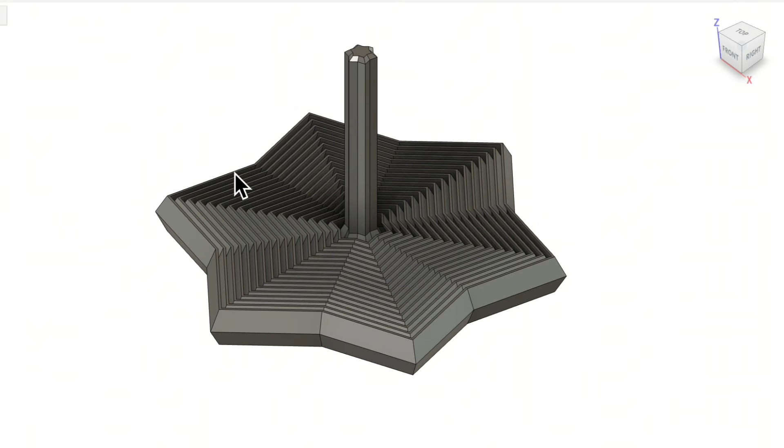This is a print-in-place slider where each ring is printed as a separate moving piece. There are tiny gaps between the rings, so once the print is finished, they can move right away. From this angle, you can see it more clearly.

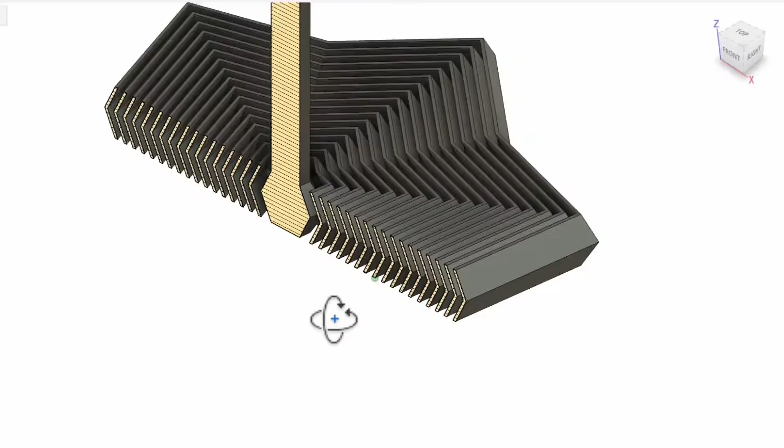Each ring is printed as a separate piece, so it is free to move, but the angled V-shaped profiles interlock with the neighboring rings, limiting the travel so the whole thing can move without coming apart. That's the trick. The parts are separate, but the shape keeps them captured together.

Okay, now that we understand the idea, we can build it from scratch. Right-click the root component in the browser and create a new component. Let's call it Star Toy. First, we'll draw the outer profile.

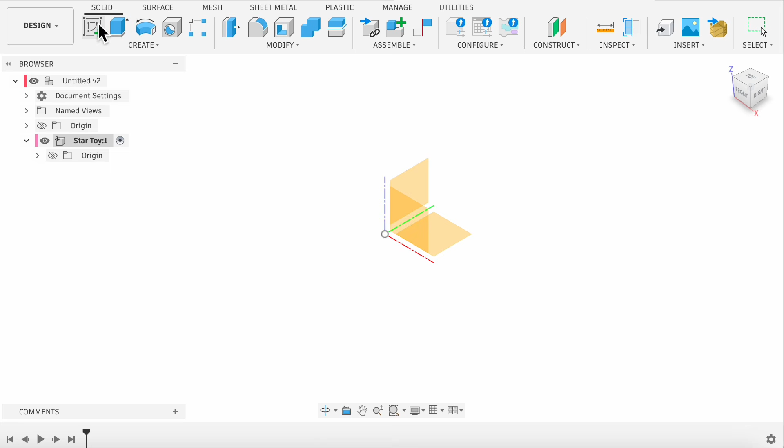I'm using a 6-point star here, but the same logic works for 8 points, 12 points, or almost any star-like outline. Create a sketch on the XY plane. Press C for circle and draw a 100mm circle. Then add a second one at 75mm. These circles are just construction geometry to help us shape the star.

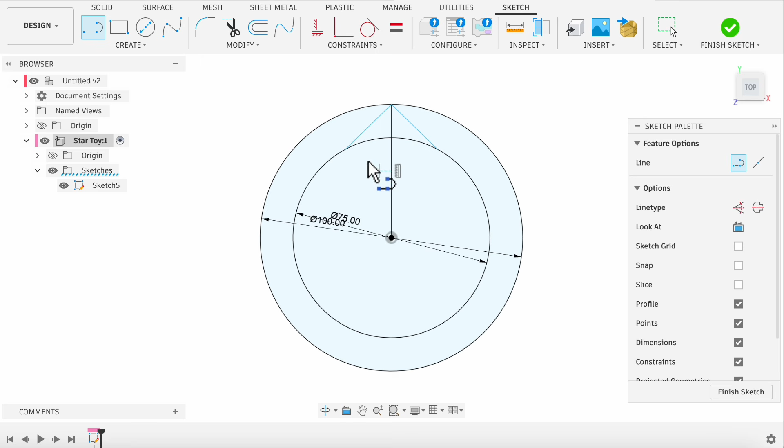Press L for the line tool and draw a vertical construction line from the center. Next, let's draw the first point of the star. Then add 2 more construction lines. Apply an equal constraint to these 2 edges. Then press D for dimension and set this angle to 60 degrees.

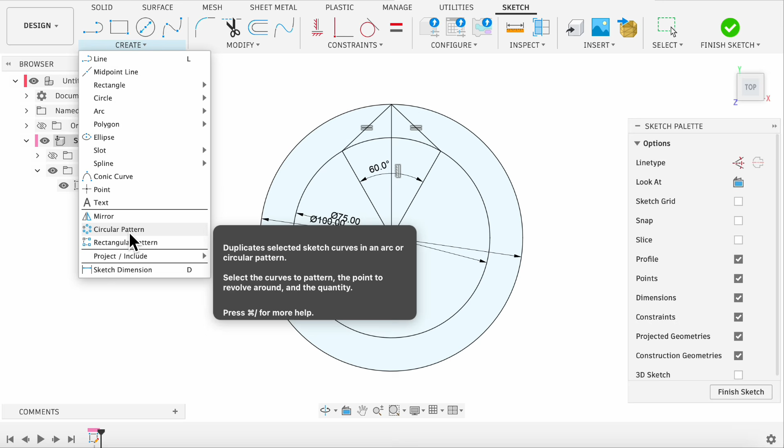Since we have 6 points, 360 divided by 6 gives us 60 degrees. If you want a 12-point star, this angle should be 30 degrees instead. Now we can use circular pattern to repeat this star point 6 times around the center. And now we have a complete 6-point star outline.

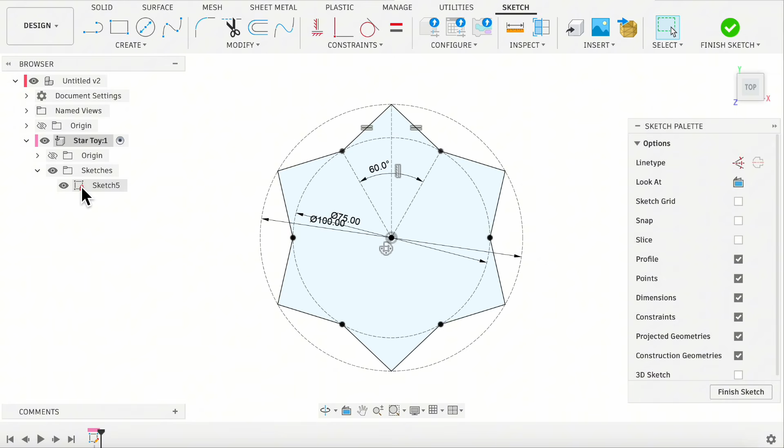Select the extra lines and hit X to toggle them to construction lines. That gives us a much cleaner profile to work with. Check if it is fully defined here, the small lock icon. Okay, finish the sketch and rename it to Star Profile.

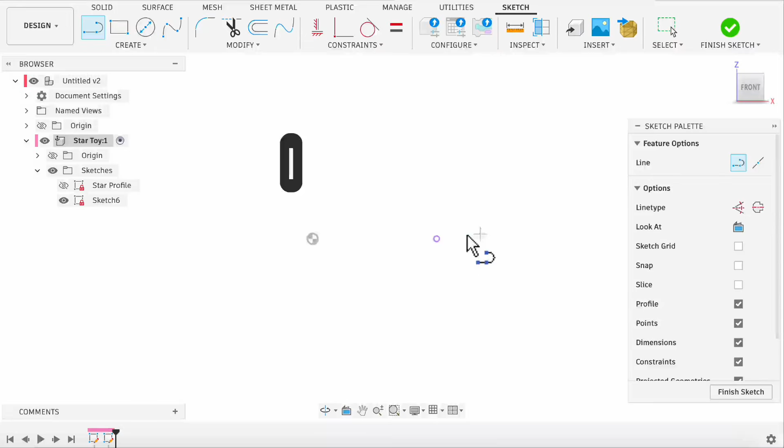Next, we need the cross-section for the sliding rings. Create a new sketch on the XZ plane. First, press P to project this point. I'll hide the star profile for a moment and draw a rough profile. Make this line horizontal. Then use a midpoint constraint to align this edge with the projected point.

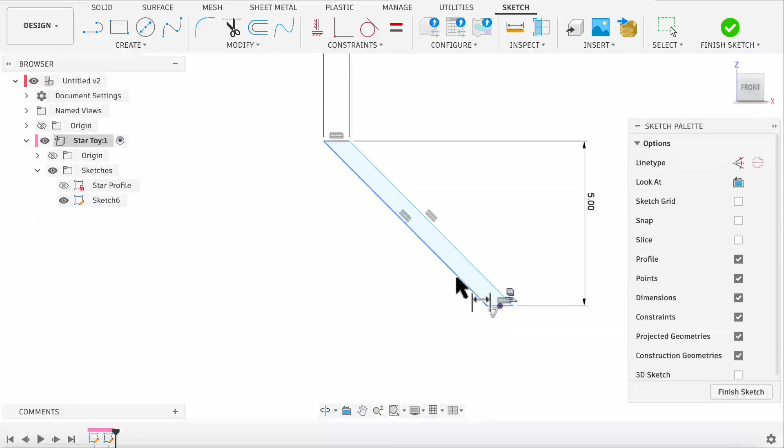Now press D and start adding dimensions. Set the thickness to 0.8 millimeters. For the height, I'll start with 5 millimeters and set this angle to 60 degrees. Now we have the top half of the cross-section. I'm using the mirror tool to copy these 3 edges to the bottom side. That gives us the cross-section for one sliding ring.

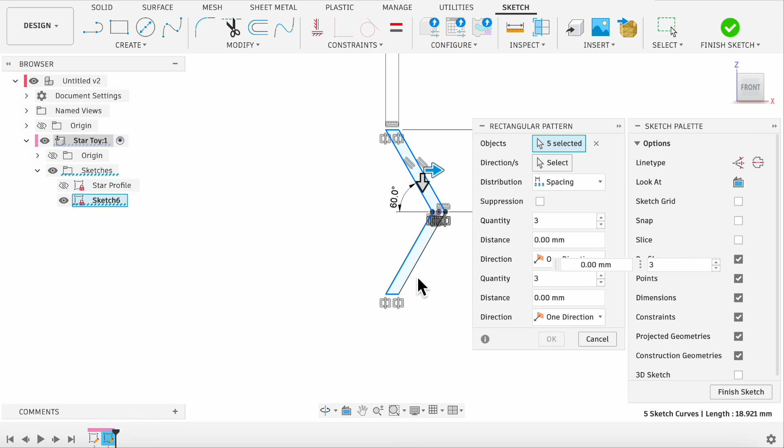Now select this line and hit X to make it a construction line. Next, we'll pattern it inward. Select all of the outer edges. Set distribution type to spacing. I'm using -2.5 millimeters. This value is a balance. Go too small, and you'll end up with too many rings and longer print times. Go too large, and the rings might slip right out.

For the quantity, let's try 20 and see how it looks. That's too many. Let me change it to 16. Still too many. Let's go with 14. That looks about right. Hit OK.

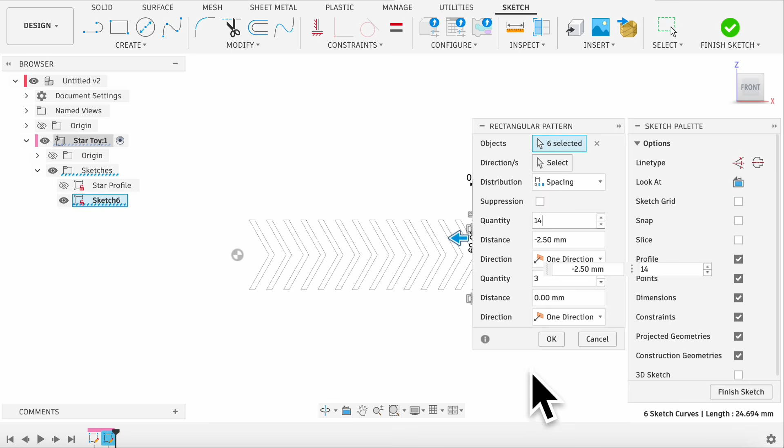At the center, we need a solid core for the handle to attach to. Use the line tool to close that profile, then add the constraints needed to lock it in place. Now, everything looks fully defined. Okay, let's finish the sketch and rename it to Sliding Ring.

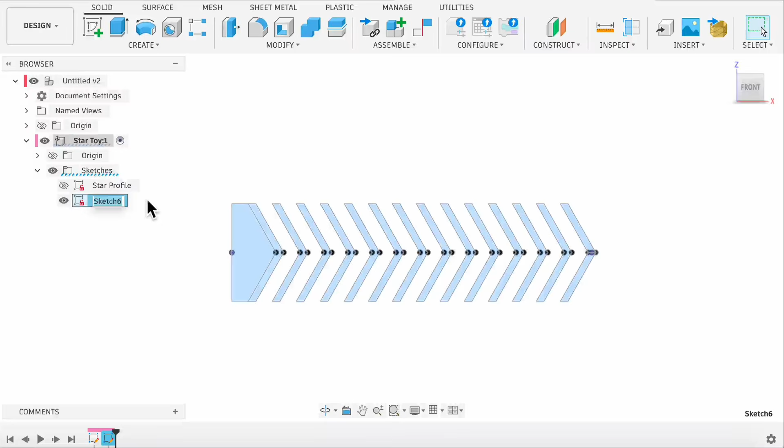Believe it or not, the hard part is mostly done. Go to Create and choose Sweep. Select all the profiles we just made. For the path, select the full outline of the 6-point star.

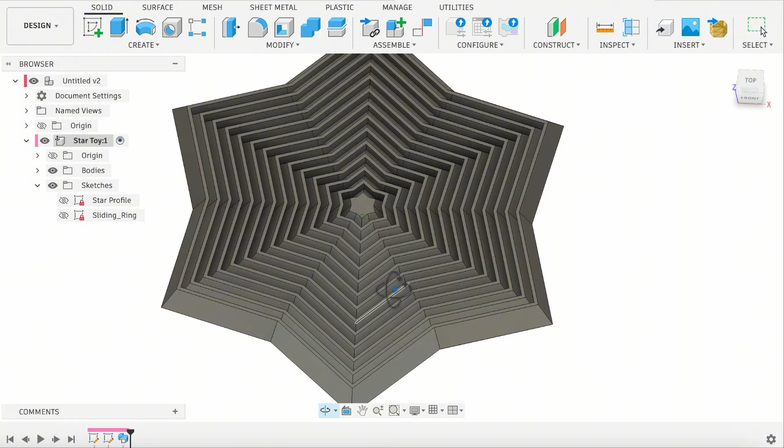To get a better look at the model, let's go to the Inspect menu and select Section Analysis. Pick the XZ plane as our reference. If you don't see anything, just click Flip. Now you can see that the rings aren't connected, but each one is trapped by the neighboring rings.

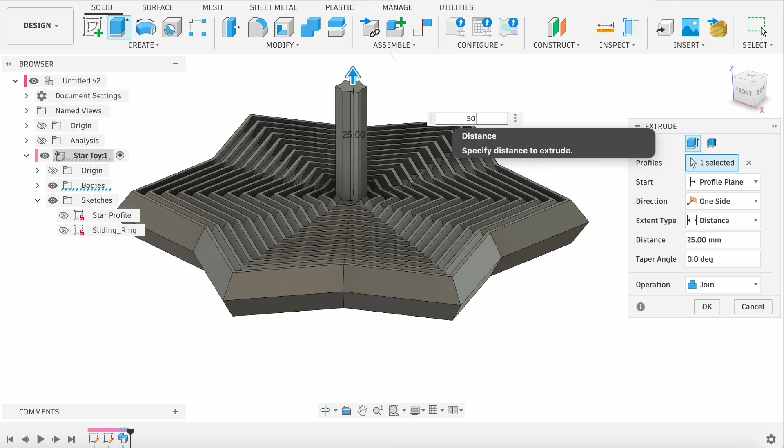Now, the only thing missing is the handle. Press E for Extrude and select the top face of the solid center core. Extrude it upward by 50 millimeters. Set the operation to join. And that's the basic star fidget. You could print it right now or give it a quick polish. Select the top edges and add a small 1 millimeter chamfer.

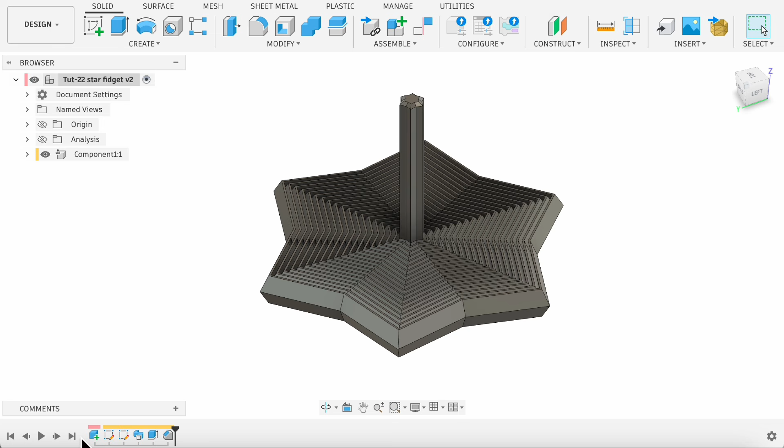It looks great. This model and the Fusion 360 3D source file are available on MakerWorld. You are welcome to download and check the source file. Through this file, you can clearly see every step of the modeling and the parameters I've used.

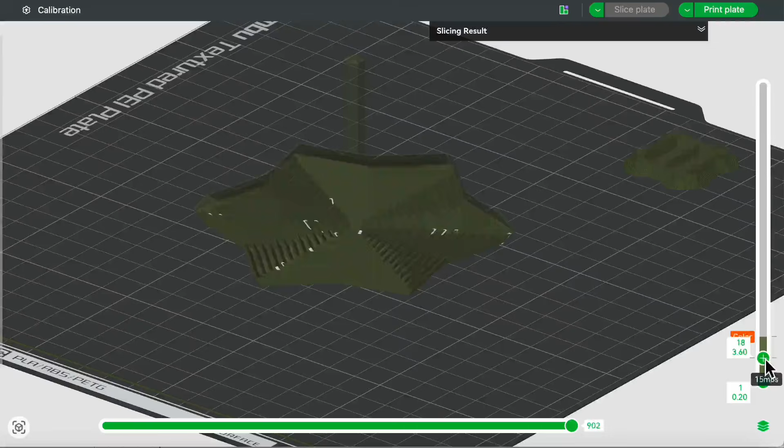Here is the print preview. You can see that from the very first layer, the rings are already separated, and they stay separated all the way up. If you want to print it in 2 colors, right-click at the layer where you want the color change and choose Change Filament. I would only change the top 2 or 3 layers of the star, so both colors show clearly, with only 1 filament change. Okay, send to print.

Here's the final print. The best part is that there is no assembly. Once the print is finished, all the moving pieces are already printed in place and captured together. When removing it from the build plate, let it cool completely first, or gently flex the build plate so the model pops off more easily. Don't just yank it off. These rings are thin, flexible, and slightly springy, so if you pull too hard, you might pop a ring right out of its slot.

After that, you can push the handle in different directions. The rings slide against each other, but the whole thing stays together. And honestly, I think the sound might be even more addictive than the look.

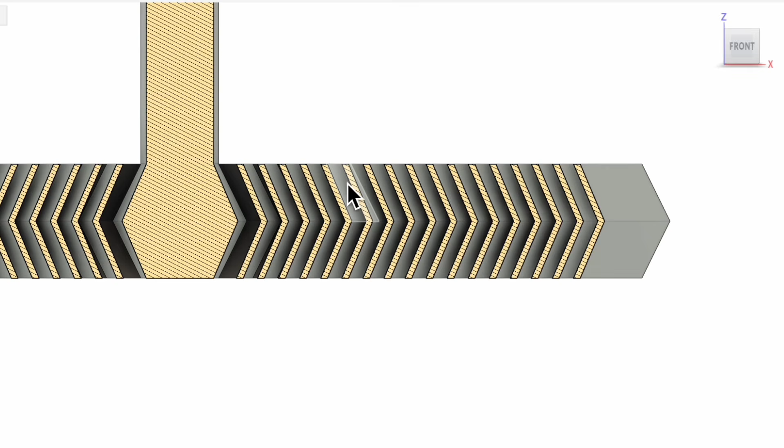Actually, I think if we keep the core structure, we can tell completely different stories with it. For example, what if the outer shape wasn't a star at all, but a set of water ripples? And the center doesn't have to be just a plain handle. It could be a little benchy sailing through the waves, or maybe a tiny frog sitting on ripples in the water.

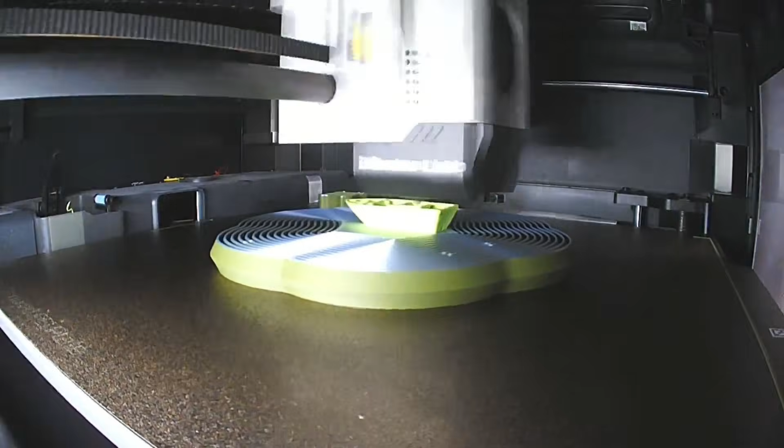To give our little benchy more room to sail, I scaled the outer diameter up to 150 millimeters, swapped the sharp star points for soft wave curves, and placed the boat right in the center. It's the exact same mechanism, but with this new theme, the whole vibe completely changes.

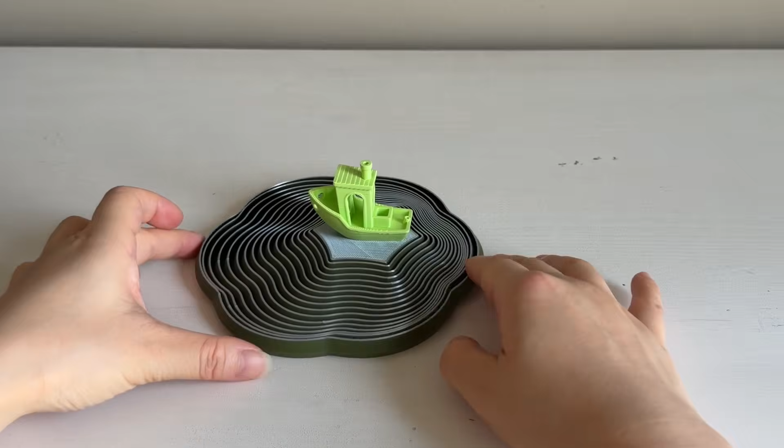I absolutely love how the ripples look, but scaling things up triggered a brand new problem. When I pushed it like this, one of the ring edges could pop out pretty easily. The reason is simple. When the boat shifts to one side, all the rings slide with it. Because this larger version has way more rings, those tiny gaps accumulate. This creates a massive gap on the opposite side.

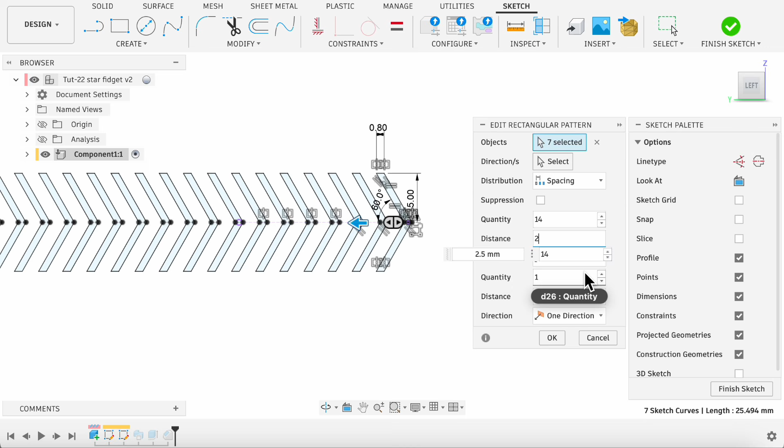If you keep it flat on a table, it's fine. But the moment you push it to the limit and lift it up, that accumulated gap gives the ring a perfect chance to escape. So for a larger version, the gaps between the rings need to be a bit smaller. That way the parts can still move, but they stay captured more securely and are much less likely to slip out from the edge.

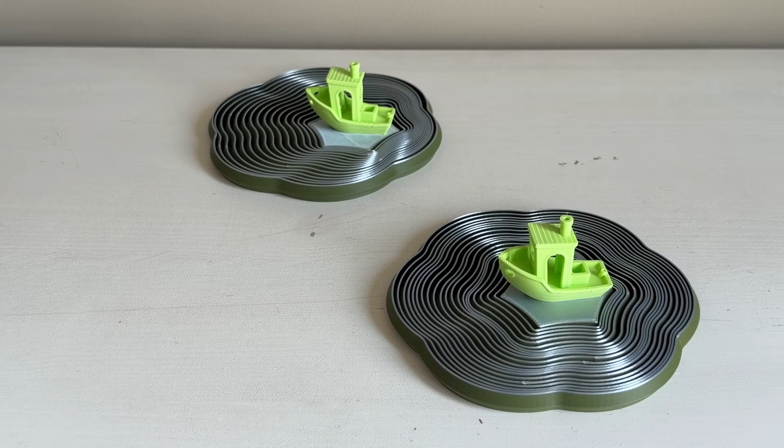Here's the optimized version. The gaps between the rings are smaller, and that also gives us more water ripples. Now when I move it like this, it stays together. The trade-off is print time and material. To make it more stable, we add more rings, so it uses a little more filament and takes a little longer to print.

Besides the benchy on water version, I also printed a frog version. You could take the same idea and turn it into a swimming duck, a melting ice cream cone, or go completely silly and make a very wobbly sunny-side-up egg. Okay, that's all for today.